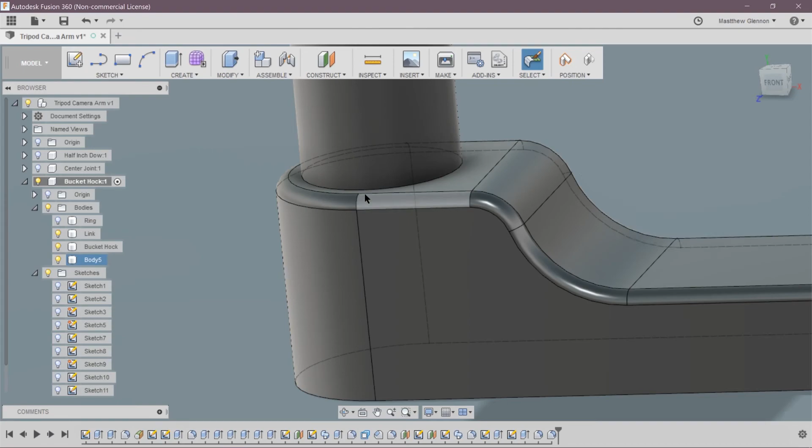So at this point in this particular project, let me load up the project and we'll explain what's going on as I do so. Let me switch to this guy.

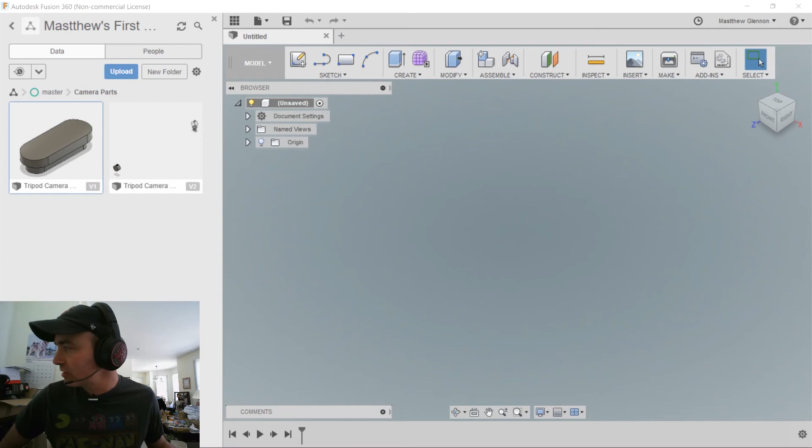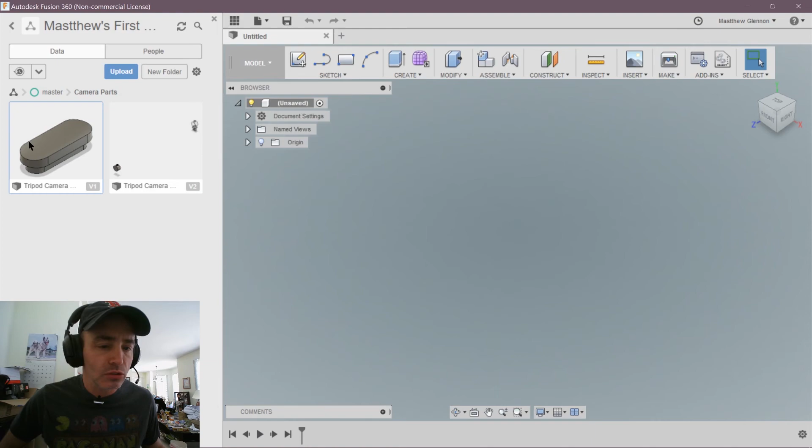So as we are heading along in this project, let's open this up. What this is, I uploaded and tried, as you saw at this point, creating this. What I realized when I was thinking about it was wood may not be the best material for this. So what I decided to do was to order a 10 millimeter carbon tube that's approximately 2 feet long.

Yes, let's see what the result is. I had problems saving it. I don't know what the end result was when we saved it last. So, looks like we're there.

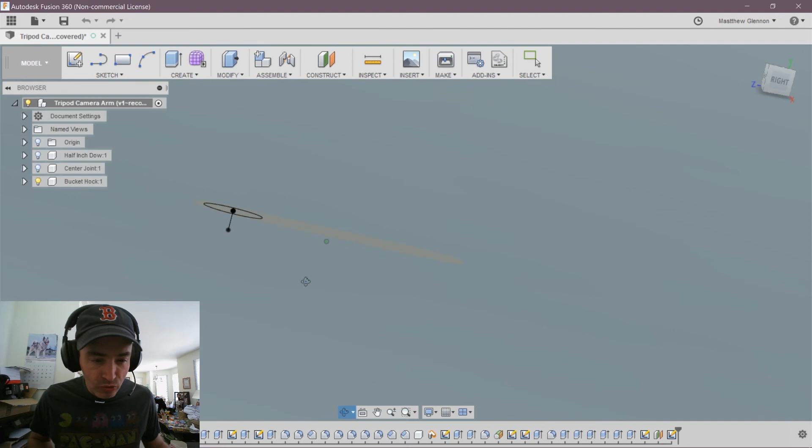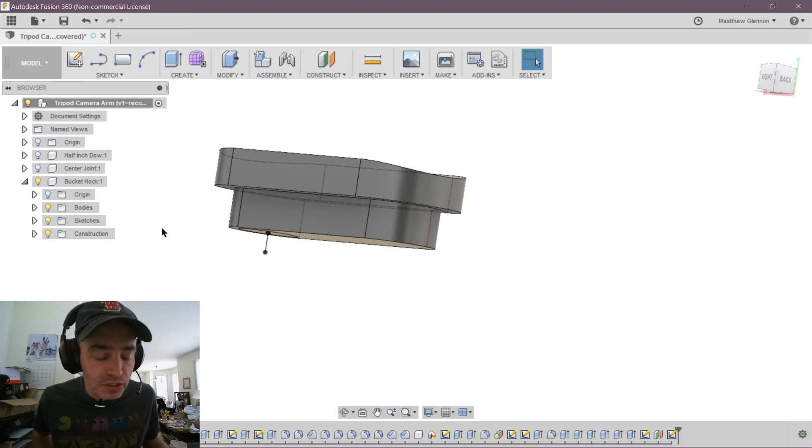Let's do some exploring here. Our bodies look like they're off, which they are. Good, okay, we'll turn that on. Alright, that's good. That's the little part that needs to be printed separately because it needs to be sitting in a certain direction. Now, looks like that looks right. The cap looks good. The reason why I now need to go back to this and not continue working on the other one, I need the history. That's why.

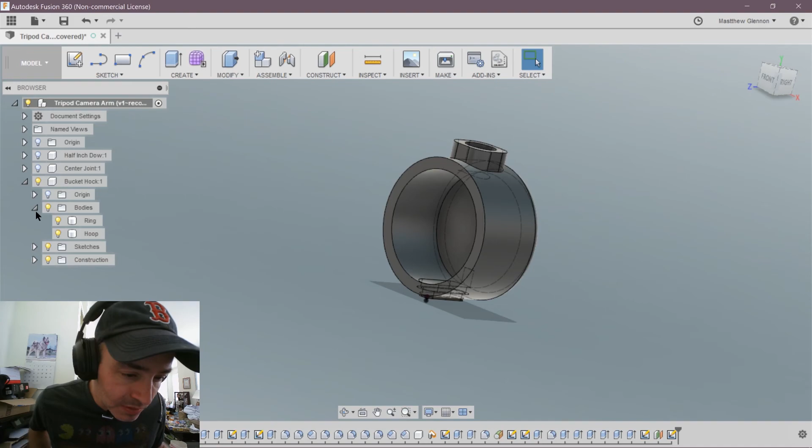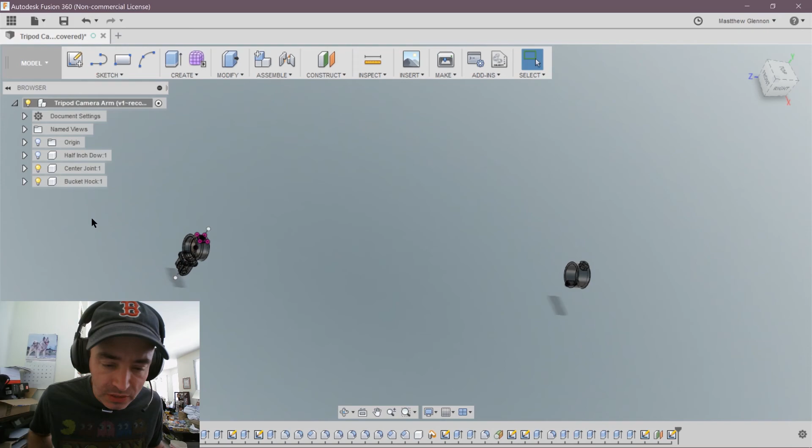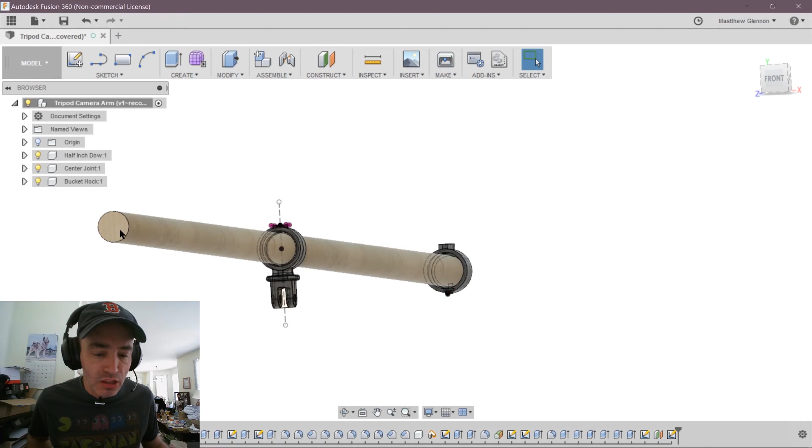Alright, moving on, let's take a look at our lovely little tube. Or what will be the wooden tube - it'll be carbon fiber in the end. But that's a 1/2 inch, not 10 millimeters, so we will need to make a change there. And I think that's where we're going to start.

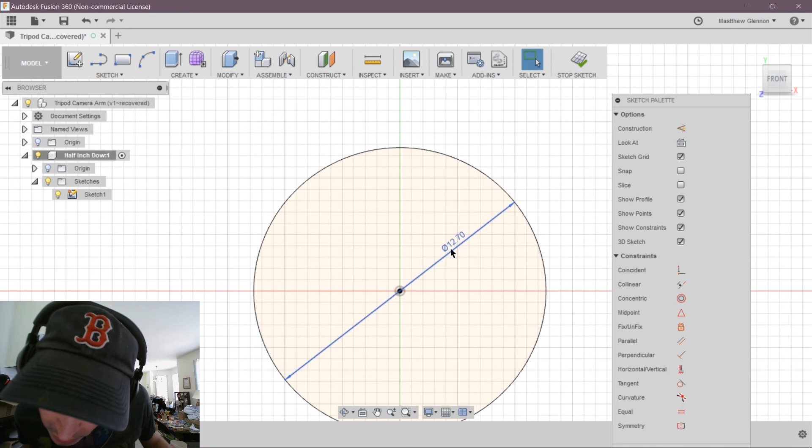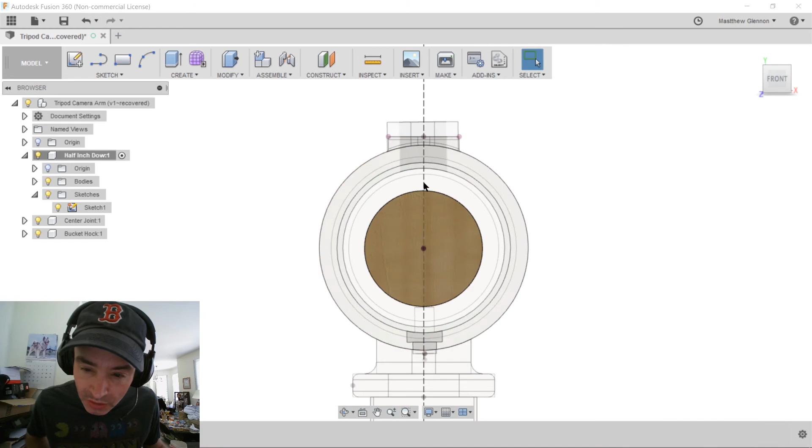I'm going to go into this area here, let's open this up, and we're going to start making adjustments on our sketch, and edit. So this isn't too bad, it's not that far off - 12.70 millimeters. So just go 10 mm. Boom, and finish the sketch.

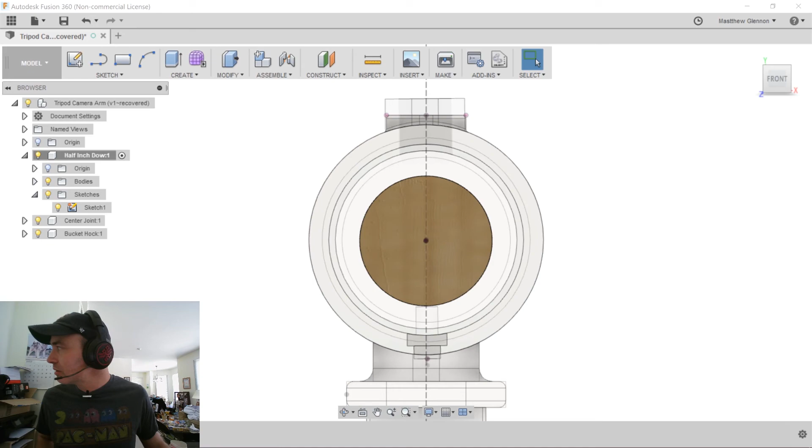That takes care of that. Now we should be able to - now my reference is reset. And I could change it to a carbon fiber material. Who gives a rat's ass? I don't. So with that, we're going to continue on. I'm going to hide my face because...

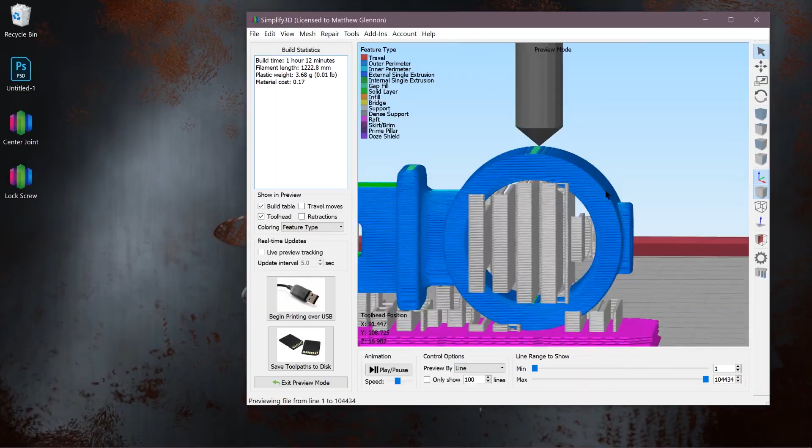So, now that we're this far along on the project, let's take a quick look at the results of part of it. I just printed out the centerpiece to see if it'll fit properly. I had some material in the printer, some standard PLA. Alright, so that part fits nicely, as you can see. So the tube slides quite nicely, so the adjustment should be pretty easy.

And I just lost my screw. How hilarious is that? Ah, there it is, it was just hiding on me. Alright, and here's our screw. I'm a little concerned, but we'll see how it goes.

It just slides in. This here, you can't - the machine can't print the threads for the screw, is basically what it comes down to. It's not the fault of the printer, the printer works great. What it is, it's just too small of a piece. It's simple as that, which is kind of unfortunate. I think, yeah, that's a bit unfortunate.